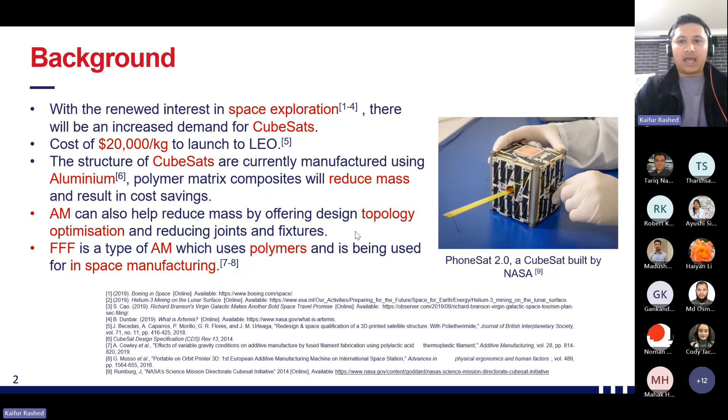So when we're talking about space, space is a very challenging environment, especially for polymers, because in space you need excellent mechanical properties - there's an immense amount of vibrations when a spacecraft is taking off, and there's quasi-static loads as well when the spacecraft is on orbit. There are temperature fluctuations between minus 130 degrees centigrade to 120 degrees C.

So the material needed to have low coefficient of thermal expansion. And there's also a requirement by NASA and the European Space Agency to have low outgassing properties of polymers used in space. Outgassing is basically when polymers are exposed to a vacuum environment, they release gases that can affect other components in space, and that can also cause plastic deformation within the polymer. So you want to minimize outgassing properties.

And electrostatic dissipation is also important, because there are charges that build up on the structure, which can get grounded onto the electronics and affect their performance. And there's other radiation as well - UV radiation, where UVB is 9 times higher in lunar orbit than in Earth orbit, and also there's cosmic radiation.

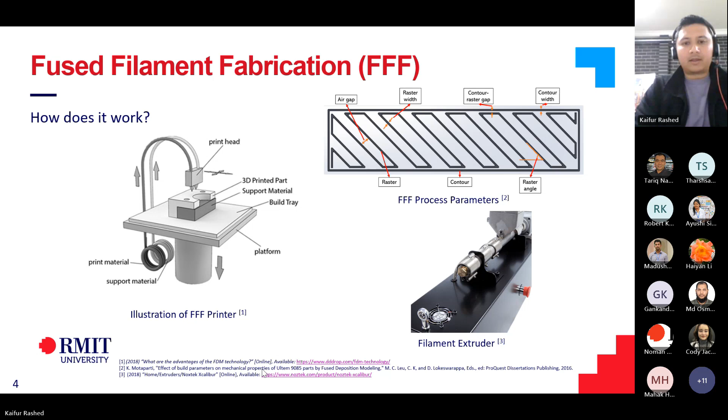One particular project I'm sharing with you today is the parameter significance study on tensile properties of PEKK. I printed PEKK in two different build orientations: flat and on edge. I used two different infill patterns as well, lines and gyroid. I used different raster angles, so 0 to 90 degree, and then 45 and minus 45. And I changed the number of contours as well. Then I tested their tensile properties to understand how these parameters affect the tensile properties.

I used a predictive model to run my experiments, since these are basically four different factors at two different levels. If you do full factorial, it would take at least 16 runs, but by using a predictive model, I could do it within 8 runs.

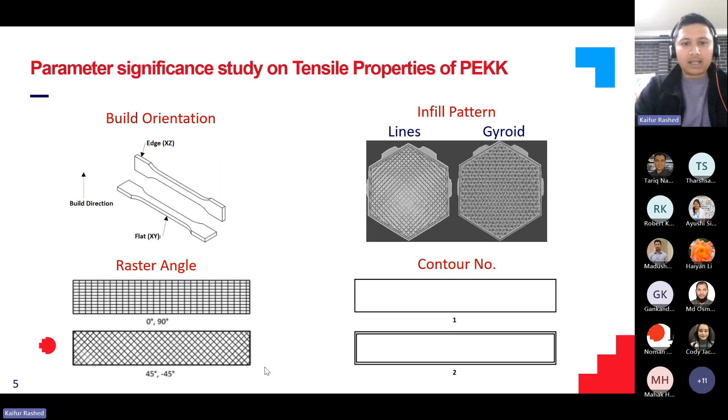These are the results of the tensile tests. As you can see, there's a significant amount of difference in elongation at break. The purple bars are the elongation at break. Between, say, the first 4 batches, the elongation at break was pretty high, but in comparison, the last 4 batches, the elongation at break reduced significantly.

The last 4 were printed on edge. We can see clearly that when you're printing on edge, the elongation at break reduces and the material becomes more brittle. When you're printing flat, it's extremely more ductile. So we are speaking of a difference between 43% and about 4%, which is significant.

In Young's modulus, although it did vary a little bit, it's not a lot. It's between 1.4 to about 1.9 gigapascals, which is not significant.

On the right here, you see the tensile test graphs between the best one and the worst one. Best being batch 3, which had the highest elongation at break, and worst being batch 8, which has the least elongation at break. You can see that the flat samples actually stretched significantly before they failed.

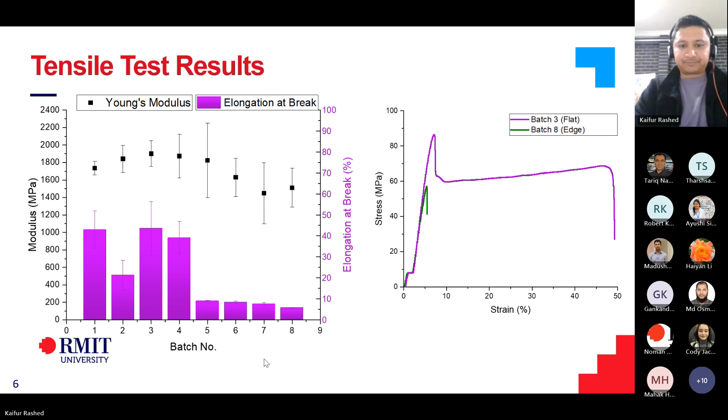Part of the research was basically understanding why this happens. So I performed some fractography analysis. I took the failed samples and examined their cross section of the failure.

When it fails, I basically looked at the cross section under an SEM, and you can see clearly in batch 3, which is the flat sample, the failure was mostly ductile, but in batch 8, you can see the individual rasters, and you can see how it failed in a brittle manner.

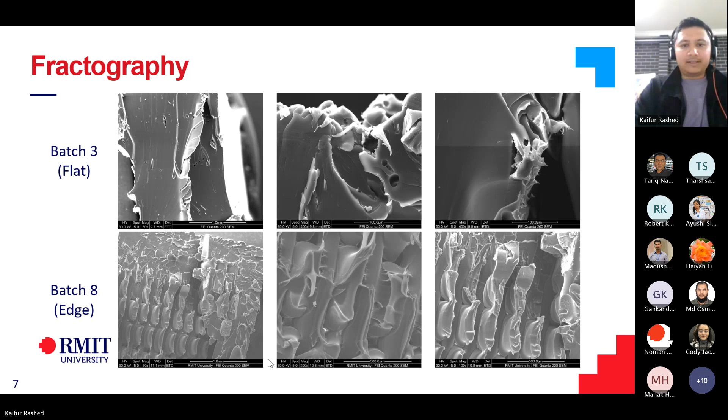But then again, the question comes, why does that happen? So then I looked at crystallinity, because crystallinity is one of the reasons why this could happen. If there's a significant difference in crystallinity between the two batches, that could cause differences in mechanical properties. So I looked at crystallinity, and as you can see, between batch 3 and batch 8, the percentage crystallinity doesn't vary significantly, it's between 2.9 to 1.1. So both are essentially mostly amorphous or pseudoamorphous.

So we can rule out crystallinity. We can say that crystallinity did not cause this. So then it could have been porosity.

So that's what I looked at later. I examined the porosity using micro-CT at RMMF. In the flat samples, the porosity was around 0.1%, which is significantly low for a custom build printer. But the ones on edge had 3.2%, which is significantly higher, so you have a lot more stress concentration points.

Since the pores were mostly oval, the representative images you see here are of pores. On the edge sample, you can see the pores are quite large and oval, which is what you don't want, because oval pores can cause more stress concentrations and premature failure.

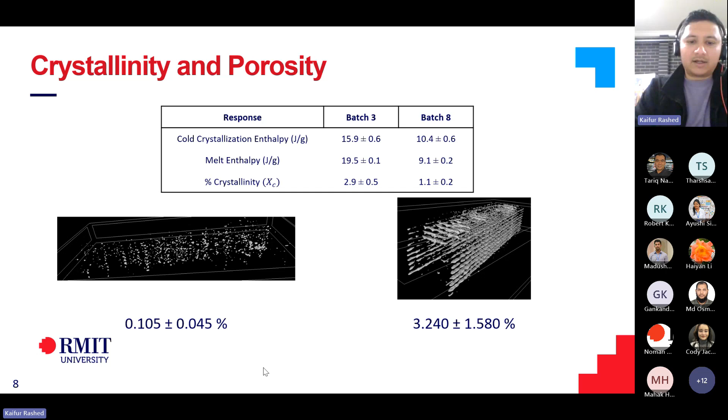And that can also cause reduced interlayer lamination as well.

So as a summary of results from the tensile stress properties, to determine the optimum process parameters to maximize tensile strength, I found that build orientation was the most significant parameter that affected the tensile properties, followed by number of contours, which were also important in determining the tensile properties.

And as I said, the degree of crystallinity were similar, so variation in elongation at break was believed to be due to porosity.

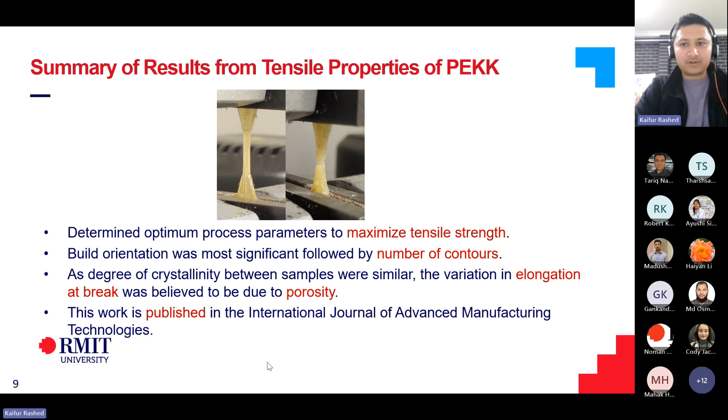And I've published this work as well in the International Journal of Advanced Manufacturing Technology, so if you want more details, please do check it out.

So the next project I'll talk about is, I essentially tried to improve the properties of PEEK using additives. Like I spoke about before, in space you need a lot of properties that PEEK alone does not have. You need electrostatic dissipation or electrical conductivity, which PEEK doesn't have inherently.

So we needed to add some additives. We looked at graphene nanoplatelets, graphene oxide, and boron carbide. Graphene nanoplatelets are known to increase mechanical properties in other polymers, and it also improves creep and wear resistance. Graphene oxide provides radiation protection, and boron carbide also improves radiation shielding.

It was tested with medium density polyethylene and polyaryletherketone. But I found that boron carbide was significantly challenging to work with, which I'll share with you in a second as well.

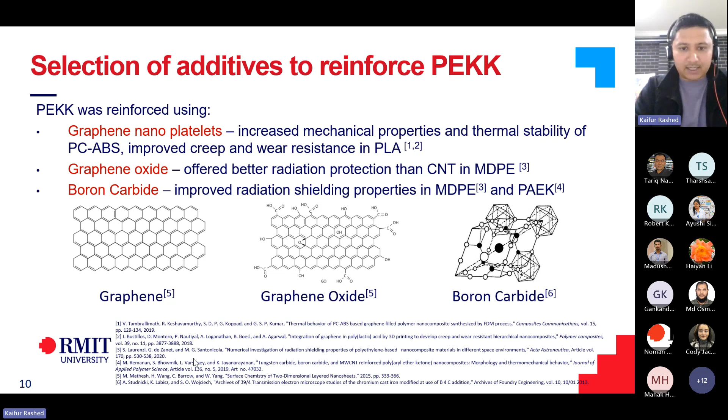So the way I manufacture the composites is I use a twin screw extruder to mix. First I mix the PEKK pellets and the additives together, then I fed them through a twin screw extruder, and then I used air cooling to cool. That's something I'll share my experience with as well.

So in literature, you'll see most polymers when extruding, they use water cooling, and that's what we tried before. But as soon as the polymer hit the water, there were a lot of pores, small bubbles within the polymer. So water cooling was not suitable for PEKK, and we had to go for air cooling.

So essentially I did that, and the twin screw extruder was used mainly to give a good mix between the polymer and the additives, and then I pelletized that, and used those pellets to test them.

So I performed thermal analysis using DSC and TGA. I studied the rheology as well, because in additive manufacturing, rheology is very important. You need to know the viscosity, and you need to know that whatever composite you're manufacturing will be able to be printed as well. That's where rheology comes in.

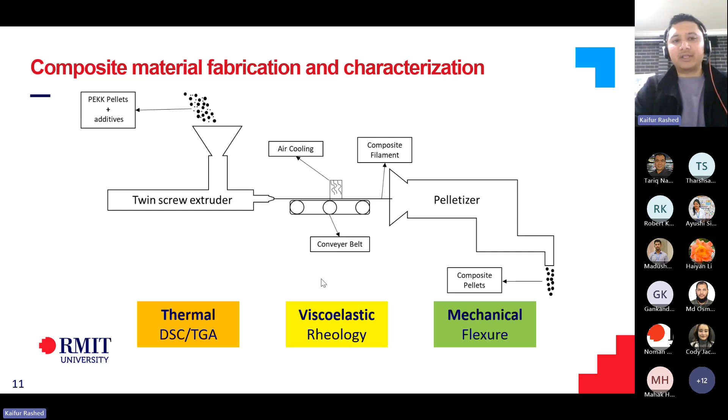So these are the rheology results. First I performed a strain amplitude sweep test to determine the linear viscoelastic region, and then I applied shear within the elastic region to determine the complex viscosity.

So over here, you'll see neat PEKK, and also a lot of the composites - the boron carbide composites, the graphene oxide. I also used commercially available filaments, pelletized them, and studied their rheology to develop a benchmark.

As you can see, the green one on top is CNT PEKK, which shows a significant amount of shear thinning. All the formulations I developed were below CNT PEKK, so we can automatically assume they were all printable. But there's some issues here as well.

If you can see the neat PEKK, which is the black square boxes, and then graphene oxide, which goes below the neat PEKK - graphene oxide essentially lubricated the polymer chains, and that's not something I expected. In literature, when other people use graphene oxide, they had good success, but for PEKK, graphene oxide reinforced PEKK became extremely challenging to work with.

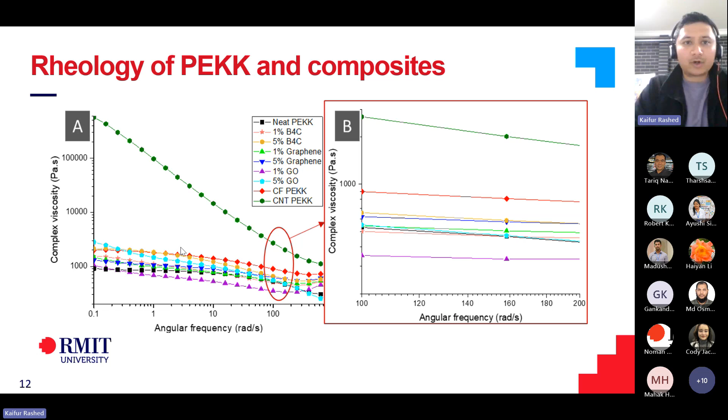When it's printed, that basically tells me it's important to have backup plans in your research. Even if you see that something has high chances of success according to literature, it's important to think about backup plans and incorporate other additives or materials you can work with in case one doesn't work.

This is essentially the filament extrusion process. On the first trial, we had a lot of air bubbles within the filament, and on the second trial, when we used air cooling, that issue was solved.

I solved this problem mainly by taking opinions of experts, because in literature everyone suggested using a water bath to cool the filaments, but then I talked to the scientists at CSIRO to come up with a plan so that we don't end up with bubbles, and they suggested using air cooling.

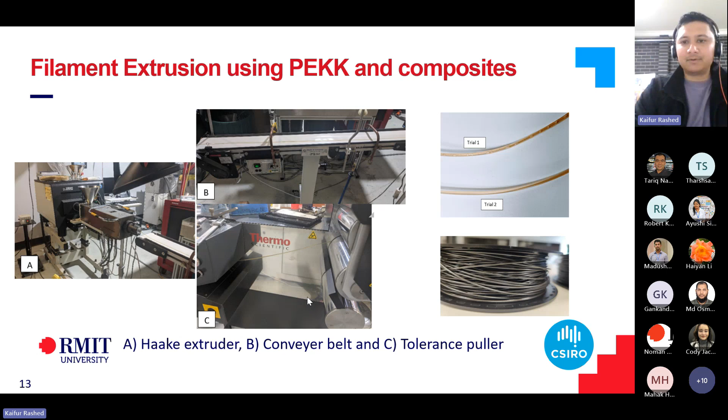So I performed TEM on the filaments as well. I took a cross section and then analyzed them under TEM to study the dispersion and distribution of the additives within the polymer matrix.

Graphene oxide shows good signs of intercalation, and so does graphene. But for boron carbide, we could only get fragments, because even though we used a diamond tip to slice the samples, we couldn't get complete cross sections on the boron carbide reinforced PEKK because of its hardness. This is the commercial CNT PEKK.

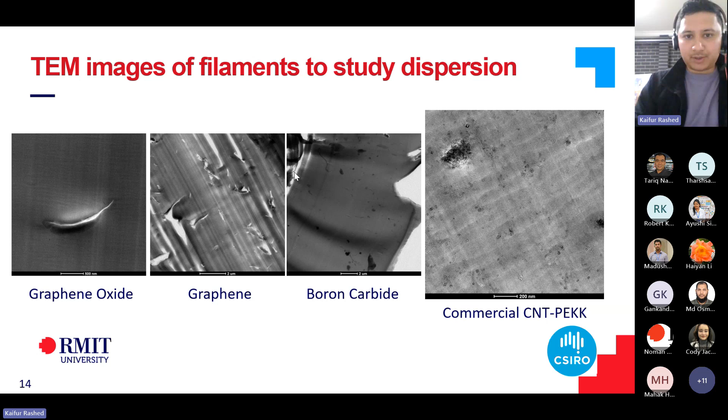This one also shows good distribution, but it also has agglomeration as well. So then I studied EDS to determine if there's any agglomeration of boron carbide, and I saw that boron carbide was significantly agglomerated, and that caused issues with feeding as well.

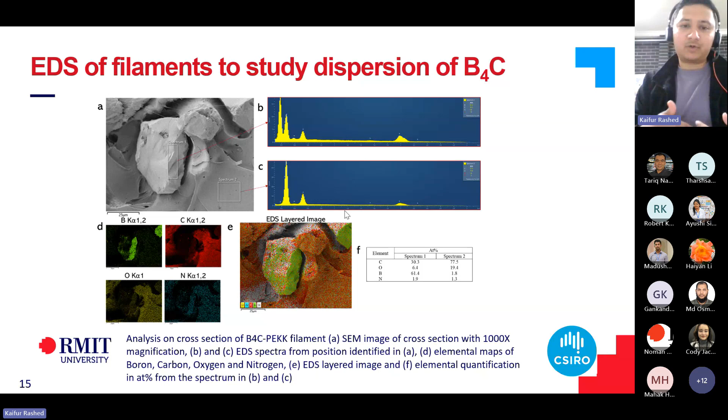When I fed them into the printer, parts were starting to wear off very quickly because of the hardness of boron carbide again. So conscious of time here, I'm just running quickly through the slides.

This work that I did on boron carbide, graphene oxide, and graphene reinforced composites has also been published in the International Journal of Advanced Manufacturing Technologies. So do check it out, and if you have any questions, do let me know as well.

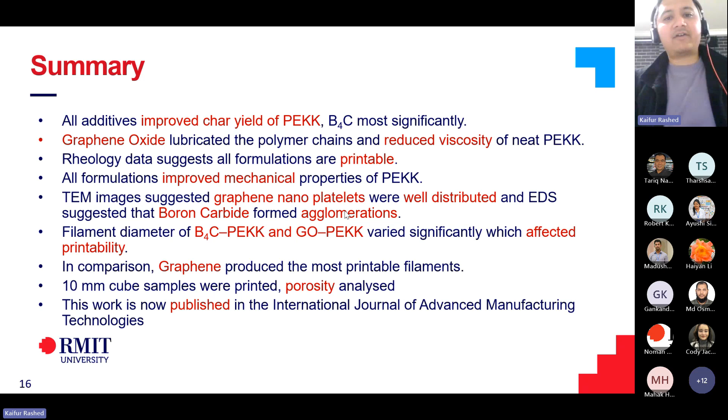The next bit that I'm going to share with you is heavy ion irradiation using accelerators at ANSTO. Like I spoke before, I formed this collaboration with ANSTO, and then we had to determine what fluence of radiation we should implement on these polymers.

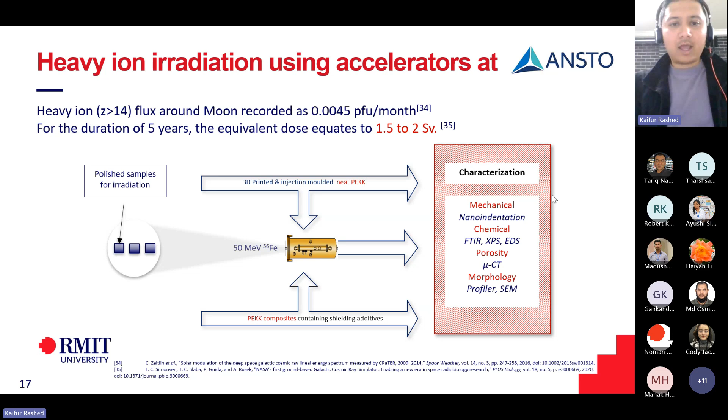For that, we had to do some simulation using SPENVIS. This is something that's used by the European Space Agency. We determined what sort of fluences of radiation are there at different locations in space.

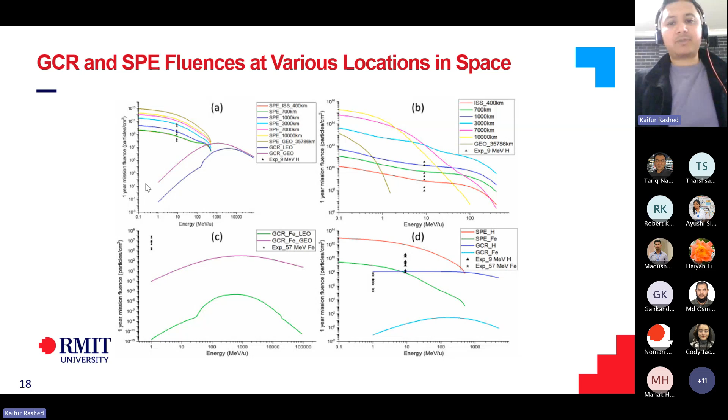If you see the black dots here, these are the doses that I put in my material. I chose something that's somewhere in between, representing some of these locations in space, to understand the variation of properties in the polymer, if any. So to do that, I printed small samples and exposed them to radiation.

Then I studied their chemical properties using XPS, FTIR, and EDS. I also performed nanoindentation to understand if there's any variation in mechanical properties. The plan was then to coat the samples and examine them under SEM, so that we could understand the fracture behavior before and after exposure.

But again, this plan failed as well. After we did nanoindentation, I tried to look at the samples under SEM, but even though we applied a significant amount of force, we were not able to see any fracture surface, because everything was within the elastic limit of the polymer. So we could not study the fracture behavior.

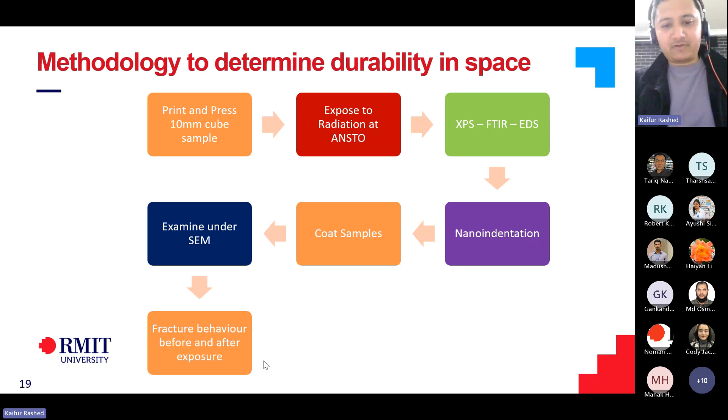As a summary, I studied the fluence of ions using SPENVIS, like I said, and I used SRIM simulations as well to understand how deeply the ion beams penetrated within the polymer.

Since ion concentration of iron was very low, it was not visible in most characterization techniques. Nanoindentation confirmed there were minimal variations in mechanical properties due to the ion beams. So essentially, additively manufactured PEKK shows potential to be used for structural applications in space.

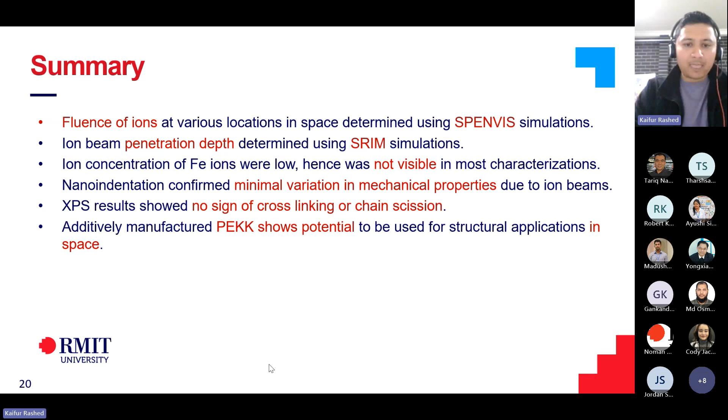This work is also published in Polymer Testing Journal, so do check it out as well. If you have any questions, do let me know. I'll conclude here, and I'll leave it to you guys if you have any questions for me.

Hi everybody. Yes, Tariq, do you have a question? Hi, can you hear me? Can you hear me, guys? Yes, we can hear you. Hi Kaifur, thanks for your presentation.

I had a couple of questions. The first question is, have you tested all your samples in a space environment as well? Have you simulated that space environment in the lab? Because in the third slide, you mentioned a lot of factors that can impact the material properties, like UV radiation was one of those.

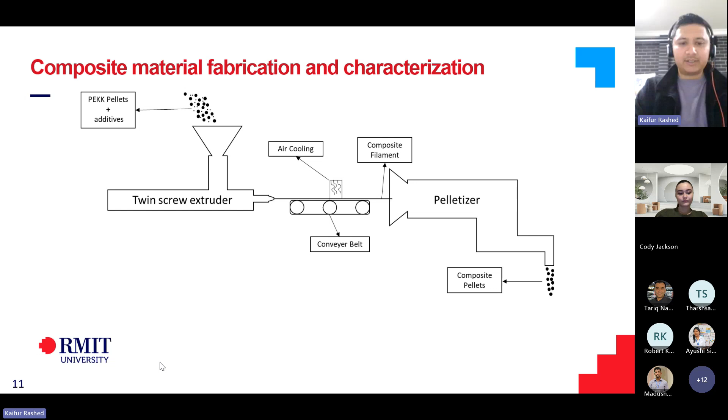I'll just go back to the slide. So I haven't tested UV radiation. But I did test temperature variation. We have access to dynamic mechanical analysis, or DMA, in building three. The properties you studied in your composites seem more generalized to me.

Because if we are connecting those materials with the space application, I'm more interested in space environment testing as well. With dynamic mechanical analysis, you can simulate temperature fluctuations in space. So I tested between minus 100 degrees to 150 degrees, and we have access to that in building three.

I've also tested the cosmic radiation using the particle accelerators at ANSTO, like I mentioned before. But to come back to your question, with the composites we did not have the time. That was one of the plans as well, but we could only test neat PEKK, and did not test the composites under space environment. Those space-like environment factors will be highly important for your mechanical testing, and that will substantially decrease the mechanical properties, so you have to consider all those factors.